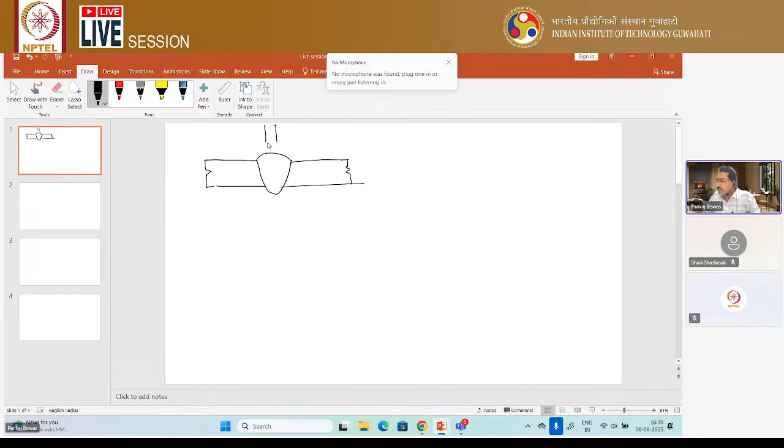So what happens in case of welding? I am just showing, then it will be very clear to you what happens in welding. Let us consider this is your weld bead geometry. Now, once we do the welding, what we observe: this is your electrode and this is your arc.

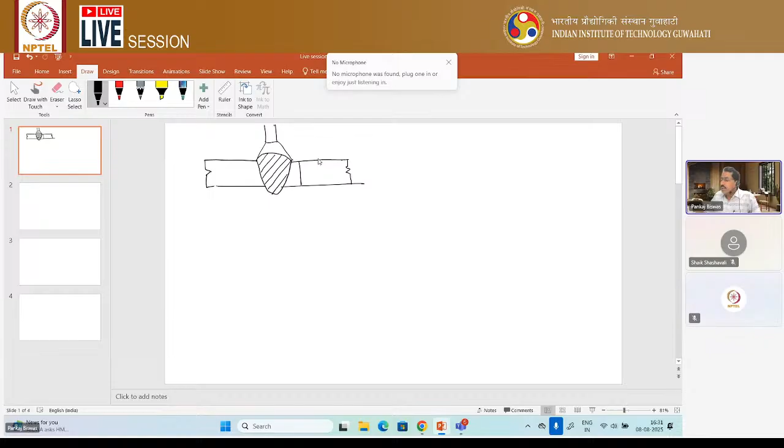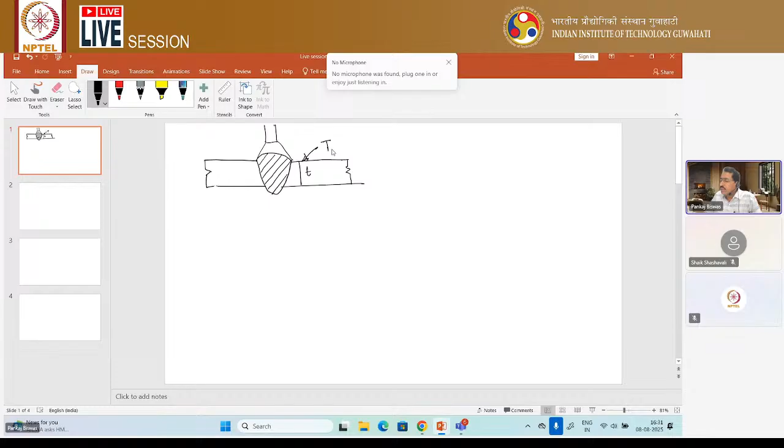So once you do the welding, there occurs generally some non-uniform heating, non-uniform in the sense that it is not uniform throughout the thickness of the plate. If you calculate the temperature distribution throughout the thickness of the plate, you will observe at the top side a temperature, let's say Tp, and at the bottom side a temperature, let's say T bottom, and these temperatures are not equal.

Understand what I am telling? So it is non-uniformly distributed over the thickness of the plate. Okay. Now, due to this, what happens in this plate? You can observe the temperature distribution. Let us consider the top side is Tp, and the bottom side is Tb.

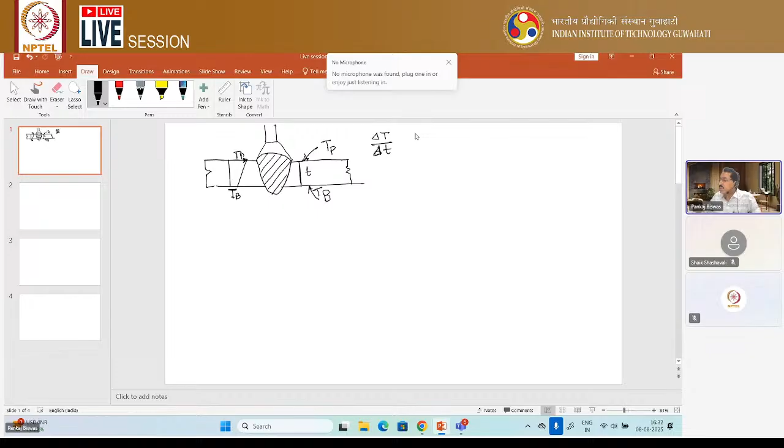So due to this non-uniform temperature distribution in the thickness direction itself, there occurs a dT by d thickness. Here I am writing T for temperature and t for thickness. So this is called del T by del t, or dT by d thickness. This is called the temperature gradient.

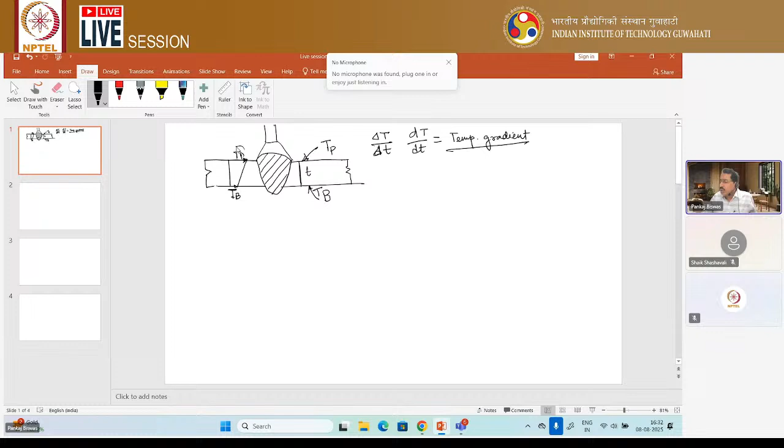Due to this temperature gradient throughout the thickness, the expansion and contraction will be different. On the top face, as the temperature is more, the expansion will be more. At the bottom side, as the temperature is less, the expansion or contraction will be less. Due to this non-uniformity, during heating it expands, and during cooling it contracts.

During heating, as it expands, how it expands is also very well known to you, because generally we know this. Let's say the thermal expansion coefficient is alpha. Thermal expansion coefficient, I am writing.

Now, what is thermal expansion coefficient? Thermal expansion coefficient means per unit degree centigrade temperature change, how much strain is coming. That is generally called thermal expansion coefficient.

Now, what is a strain? That's why this thermal expansion coefficient has a unit that is per degree centigrade, you can say. Degree centigrade or Kelvin, whatever it is, but degree centigrade. Okay, you should keep this. That means per degree centigrade, how much strain is generated in a structure, that is generally called thermal expansion coefficient.

So what is the thermal strain at the top side? Let us consider thermal strain. I am writing epsilon T. So thermal strain you can write as alpha into change of temperature, delta T. As this delta T is more at the top side, the thermal strain epsilon T at the top side will be more than epsilon T at the bottom side.

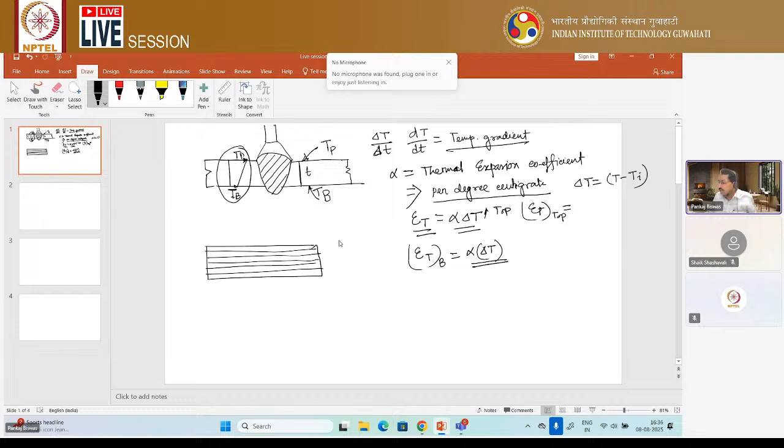Due to this non-uniform heating and cooling, let us consider this plate represented as different layers throughout the thickness. You will observe that during heating something is expanding more. It tries to cool down during cooling time, but due to this non-uniform thermal expansion and contraction, all the layers cannot contract or expand equally.

That's why some layer is subjected to expansion type of state after cooling, and some layer is subjected to tensile type of nature after cooling. Due to this reason, some stresses are developed inside the weld zone.

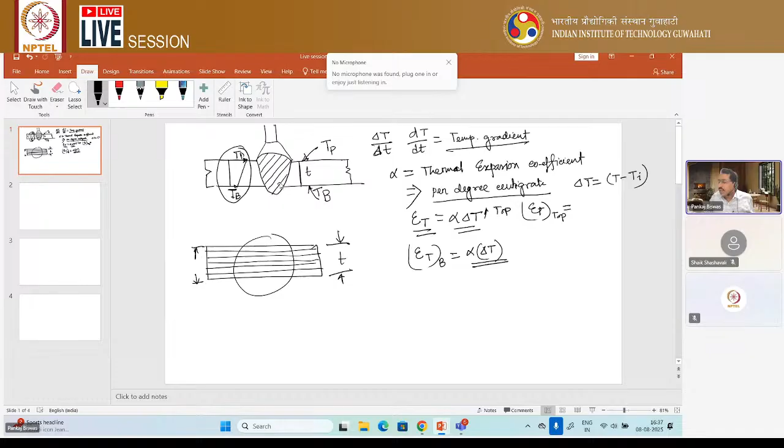Now, residual stress, you should always keep this. This is the basic concept I am telling; in more detail I'll tell just after this. What is the cause of this residual stress? The main cause is non-uniform expansion and contraction, which is the main reason residual stress develops in the weld zone.

Because if you heat a plate in a furnace and cool it in a furnace, which is uniform heating and cooling, all the layers of the plate are subjected to uniform expansion and uniform contraction. At that time, as the layers are not subjected to any tension and compression effect after cooling, there will not be any residual stress.

So residual stress will be there where some layer remains in an expanding state after leaving of load, and some layer in a contracting state. It tries to return back to its original position, but due to this variation of thermal expansion and contraction, it is not possible. So the layers of the plate are subjected to some straining after cooling of the plate due to this non-uniform heating and cooling phenomenon.

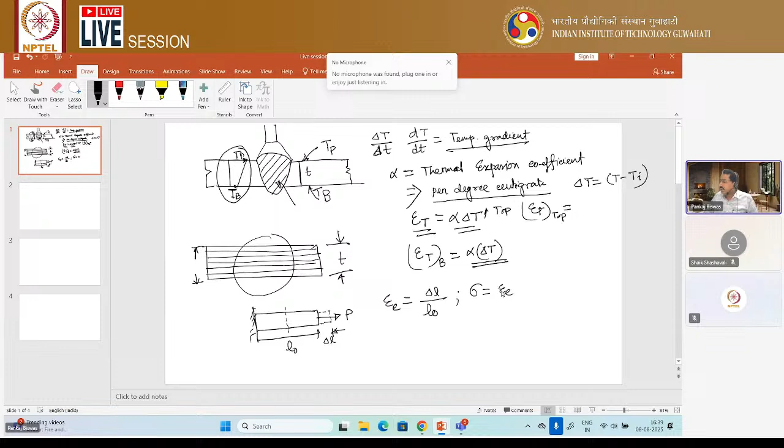Now, what is a stress? Generally, according to Hooke's law, stress is equal to Young's modulus E into epsilon. This is according to Hooke's law. This is very well known to you. So that's why once something is subjected to some strain.

So you know this. Whenever it's subjected to some change of length, then this change of length by original length is called strain. So whenever there is some strain condition inside the structure, that means change of length remains, then only this strain will come. And if you multiply this with the Young modulus, then there will be some stress.

But if a structure is subjected to uniform heating and cooling, that means same expansion, same contraction, what happens? Like the furnace heating case. In furnace heating, if you heat it, it will expand uniformly. Once you cool it, it cools down uniformly. So for those cases, generally for thin sections, the residual stress will be almost 0.

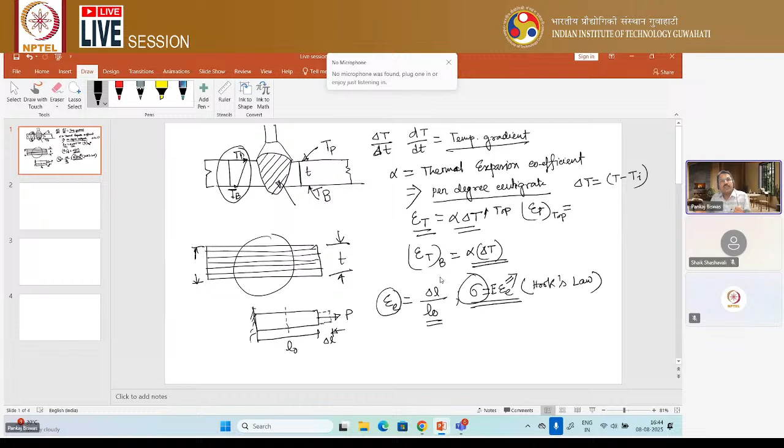Due to these phase changes, it is not able to expand and contract uniformly. That's why I also said there can be some locked-in stress there. So always keep it in mind: wherever there is non-uniform expansion and contraction type of phenomena, there will generally be locked-in stress or residual stress, because one layer generally prevents another layer from returning back to its original position.

So one layer will be subjected to tensile, another layer can be subjected to compressive. These types of phenomena generally occur. This is one case. Just a little bit, in a general way, I tried to make you understand. Okay. Now let's see if you have any queries. More details I can discuss later on also.

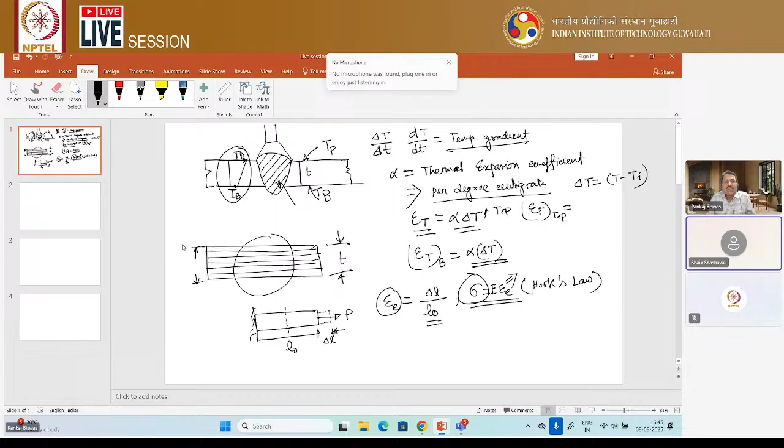Till now, students don't have any queries. Good evening, sir. Yes, very good evening. Do you have any queries? Yes, sir. Actually, I missed the assignment submission, sir. The first and second assignments I missed. Yeah, you sent me that mail, correct? So you forgot to submit the first one and second one, correct? Yes, sir, exactly.

Actually, for that I don't have any objection, frankly speaking. But if the NPTEL team permits you, then I don't have any issue. I can make a separate question set for you. But first, complete the remaining sets, okay? And try to take permission from the NPTEL personnel. If they permit, immediately we can make the question paper, because this is not in our hands. Sir, how can I approach the NPTEL team? Where you registered, there will be a contact number and mail address. From there you can get the idea. Okay, sir. Thank you, sir.

Okay. You have messaged me. I think two assignments you did not submit. Yes, sir. First and second both had the same deadline, and there was no pop-up or mail received. For the third assignment, I received mail, sir. For first and second, not received. Definitely, I will help you. Just talk with them. If they permit you, I will help. Okay. Thank you, sir.

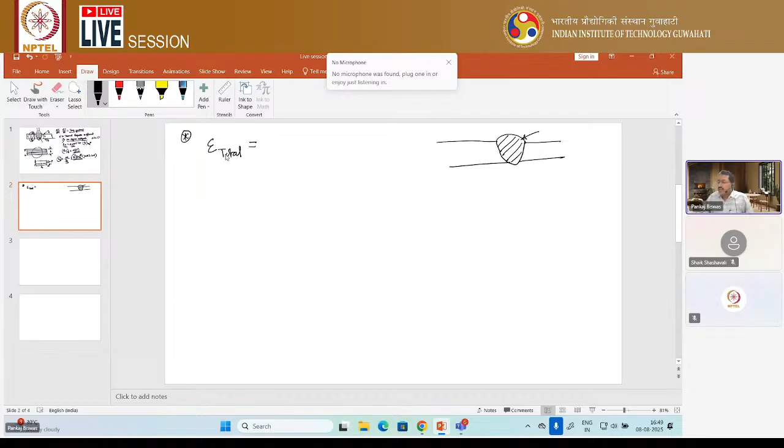Total strain you can represent as epsilon total equals elastic strain plus plastic strain plus thermal strain, where thermal strain is epsilon T. This is during heating time. Now you see, once it's cooled down, this thermal strain part generally converts to elastic strain and plastic strain, epsilon E dash plus epsilon P dash. That means the thermal strain is converted to elastic plus plastic. This is after cooling.

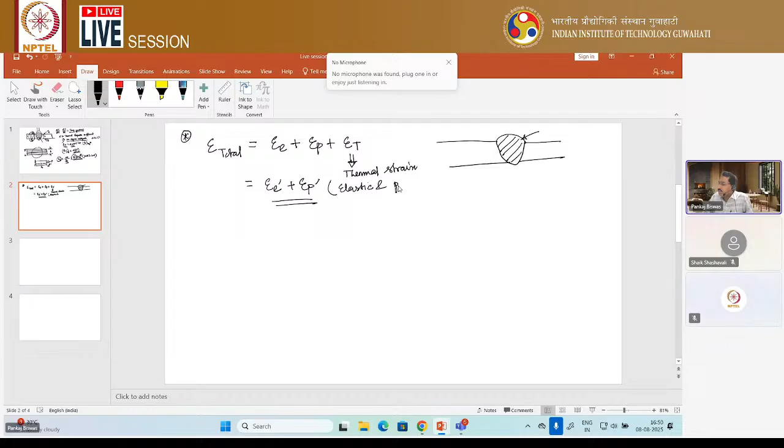So you can say after cooling, then what happens? This total strain is a combination of what is called elastic and plastic strain. This you should keep in mind. Now this plastic strain, what can you write? Plastic strain you can write as epsilon total strain minus epsilon elastic strain. So always you should keep it in mind. This plastic strain has a name, which is responsible for both deformation as well as residual stress.

Now I told you that residual stress is a locked-in stress. If you just remove that locking, it can return back to its original position. So which strain can return back to its original position? You know very well. Elastic strain can return back to its original position, correct? That you already studied in what is called the stress-strain diagram. A little bit I am explaining, then it will be more clear to you. Let us consider this is sigma and this is epsilon, engineering stress versus engineering strain. Sigma represents stress, epsilon represents strain. For a ductile